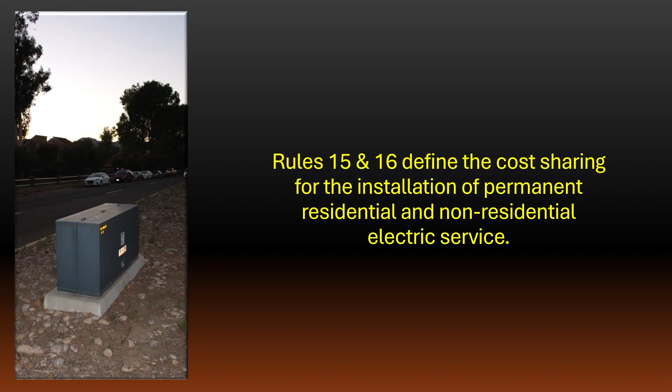If you recall from Part 1, Rules 15 and 16 define the cost sharing for the installation of permanent residential and non-residential electric service. In Part 2, we're going to cover some special or unusual construction situations in which the application of the rules may vary. For example, Rule 15 requires special facilities requested by the applicant to be at the applicant's expense.

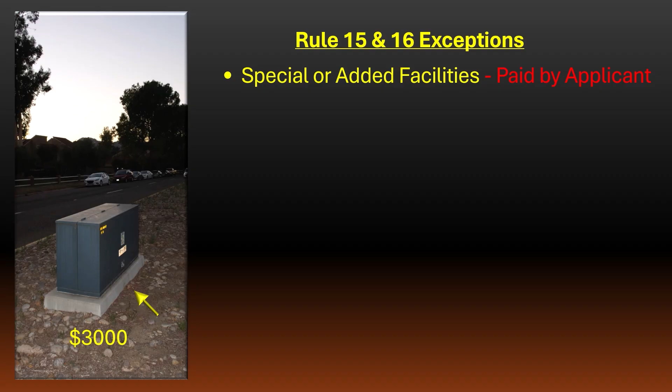For example, to connect underground runs of conduit and high-voltage cable, many utilities prefer to use pad-mounted terminator cabinets, similar to the one shown at the left. However, to minimize the visual impact of this type of equipment in new residential neighborhoods, many developers prefer the use of more expensive subsurface vaults, shown at the right.

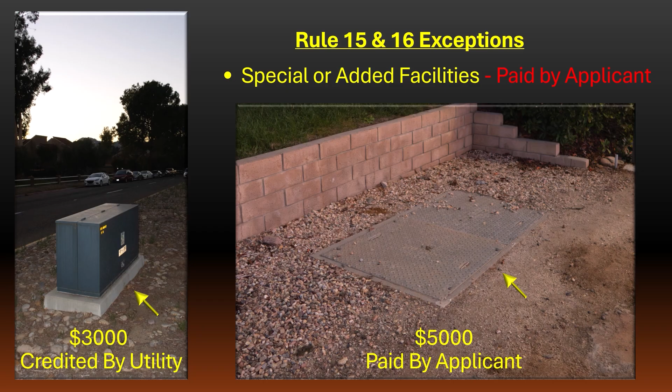When the vaults are installed in place of the cabinets, the additional expense will be paid by the applicant, and when the facilities are deeded, the utility will credit to the applicant the value of the cabinet pad only, not the value of the vault. This is an example of how the additional expense of special facilities is paid by the applicant.

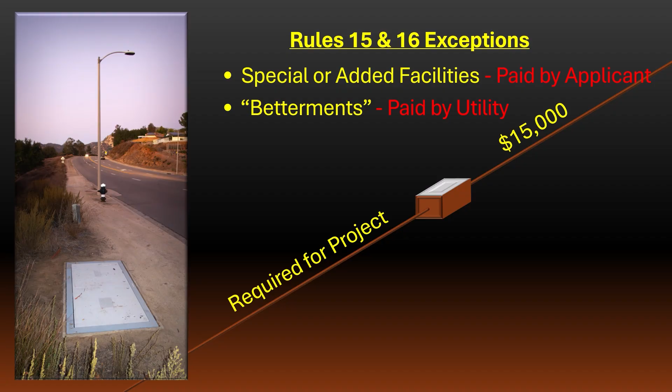Conversely, betterments are defined as the additional facilities installed by the applicant at the request of the utility. This may include additional substructures, conduits, or other facilities requested by the utility for future use. For example, if it's determined the conduit and vault shown are the facilities required for the applicant's project, but the utility requests additional conduits or larger vaults, the additional cost may be paid by the utility.

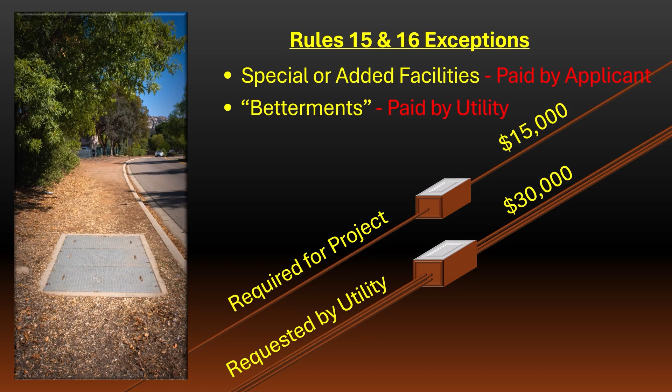Relocations or rearrangements of any existing electric facilities at the request of an applicant will be paid by the applicant. For example, if the transformer shown at the left needs to be relocated because of new construction on the applicant's property, all expenses of the relocation will be paid by the applicant.

When overhead electric facilities exist and an applicant requests to have the facilities converted to underground, this is an overhead to underground conversion and is not covered under Rules 15 or 16. See CPUC Rule 20 or check with your local utility representative for the construction and cost responsibilities of overhead conversions.

Streetlights shall be installed in accordance with the service provisions of the applicable streetlight schedule. Construction of facilities for emergency or insignificant loads are not eligible for allowances. And finally, temporary services are installed in accordance with the fundamental provisions of Rule 15, except all charges and refunds shall be made in accordance with CPUC Rule 13. Check with your local utility representative to determine if your project includes any of these special provisions.

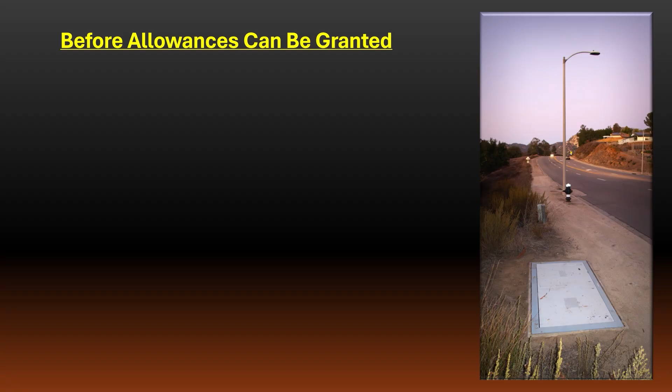Before allowances can be granted by the utility, a few provisions need to be met by the applicant. First, the utility is provided evidence that construction will proceed promptly and financing is adequate, and the applicant has submitted evidence of building permits, home purchase contracts, or lease agreements, or where there is equivalent evidence of occupancy or electric usage satisfactory to the utility. Once these provisions have been met and are satisfactory to the utility, the allowances will be granted and construction can begin.

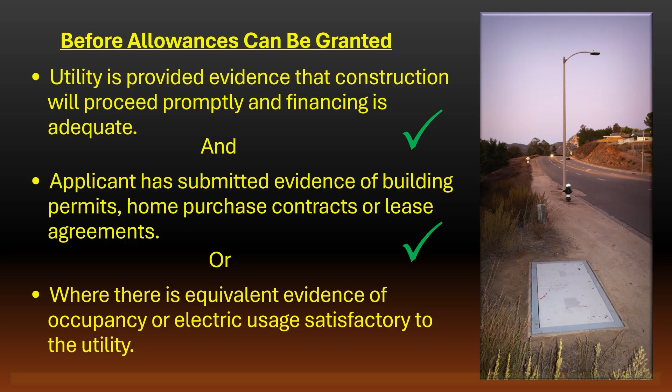Before we get to the example, let's talk a little more about facilities that are installed by the applicant and those deeded to the utility. If you recall the example from Part 1, let's start with the electric meter panel. This electric enclosure is installed and owned by the applicant. Conversely, the electric meter is always installed and owned by the utility.

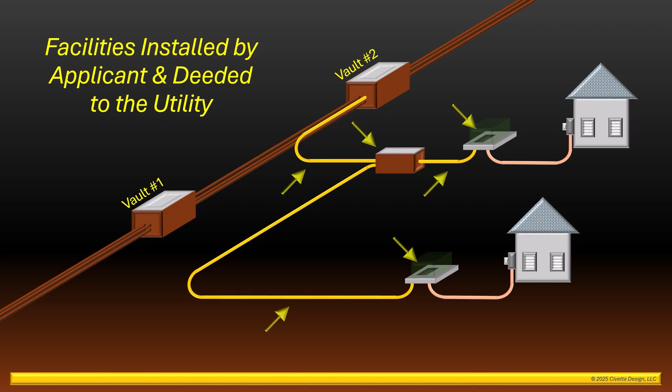The service conduits are installed and owned by the applicant. However, the service conductors within the conduits are installed and owned by the utility. The substructures and primary conduits, including the concrete pads on top of which pad-mounted electric facilities are installed, are all installed by the applicant and deeded to the utility. The transformers and high-voltage cable are all installed and owned by the utility.

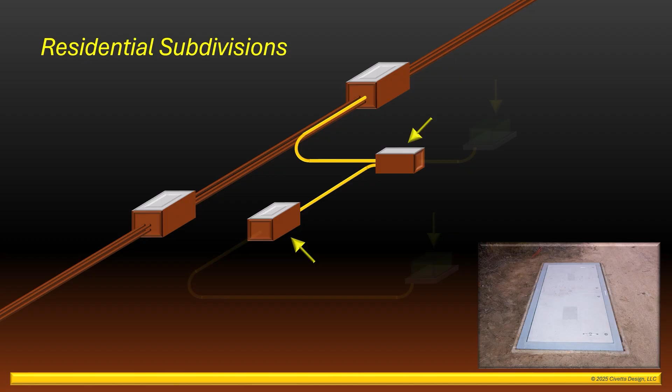Let's take a look at a residential subdivision. In this type of electric distribution construction, the distribution extension into the subdivision is typically comprised of conduit containing high-voltage conductor and a series of underground vaults connecting the conduit and cable. The conduit, conductor, and vaults are typically installed under new sidewalks that wind their way throughout the subdivision. Electric transformers are typically installed behind the sidewalks and between the homes.

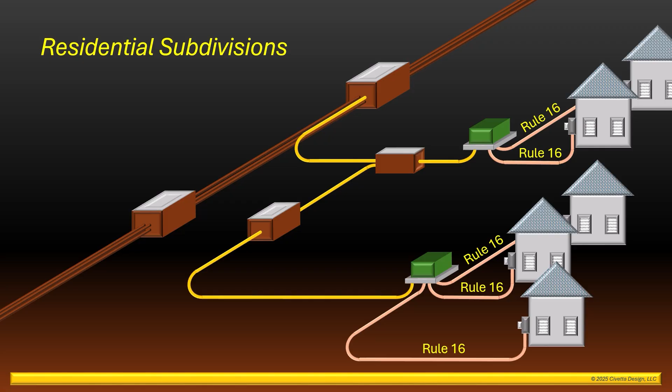Depending on the size of the new homes, a single transformer can provide electric service to about 20 homes. Since the transformers provide electric service to more than one customer, everything installed up to and including the transformer is installed under the provisions of Rule 15. Each of the individual services are then installed under the provisions of Rule 16.

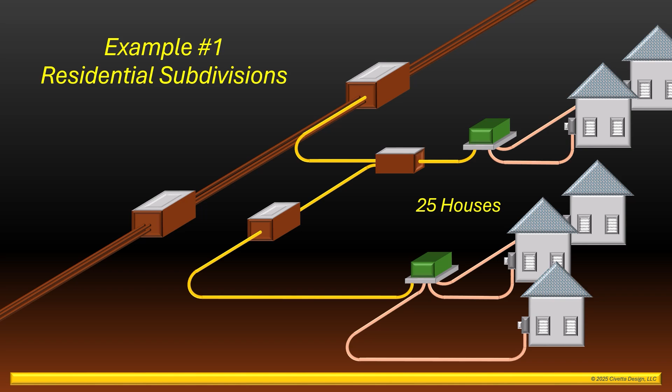Let's do an example. Let's assume a developer wants to build a residential subdivision with 25 new houses. To start the project, the developer hires an applicant designer at a cost of $12,000 to complete the construction plans required for the new development. This period of time is typically referred to as the planning phase.

During production of the construction plans, the utility requests some additional facilities to be installed that are not related to the project itself. Located on the property of, but not related to the new electric service of the development, this would be considered a betterment.

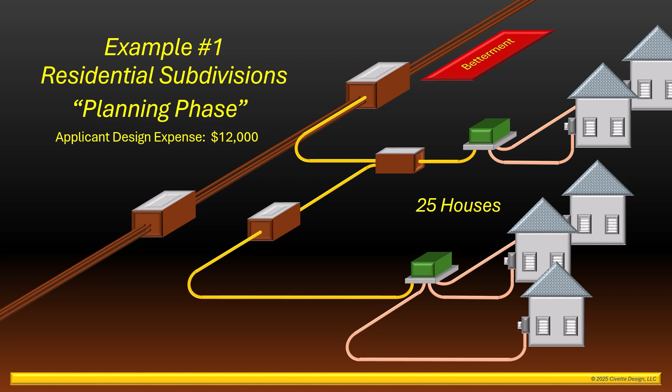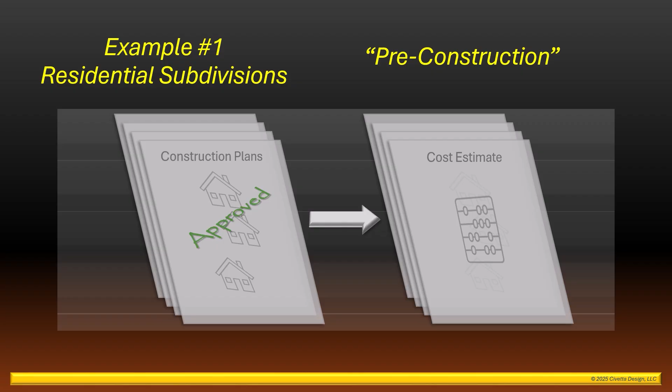Once the construction plans were completed and approved, the project advanced to the pre-construction phase. During this period of time, the utility was then able to provide a construction estimate to determine the estimated construction costs, allowances, and credits. They will first determine the estimated value of the substructures to be installed by the applicant for the work related to the subdivision, $34,200. Second, they will determine the additional cost for installation of the betterments requested by the utility, $9,000.

And lastly, they will determine the cost of the portion of the work to be completed by the utility, $63,800. The total of $107,000 is what needs to be paid to the utility prior to starting any work. Next, they will determine the applicant's construction allowance. In this case, it would be the fixed residential allowance of $3,250 for each of the 25 new homes, a total allowance of $81,250.

Since the developer hired an applicant designer to produce the construction plans at a cost of $12,000, the utility provides a credit for the cost of the plans had the utility performed the work themselves, $9,500. Lastly, they will determine the construction credits for the work to be performed by the applicant. This includes the estimated value of the substructures installed by the applicant for the development, which was already determined to be $34,200. The utility pays the additional cost of the betterments, including the installation, estimated at $9,000. The total estimated value of this work, $43,200, is the applicant installation credit.

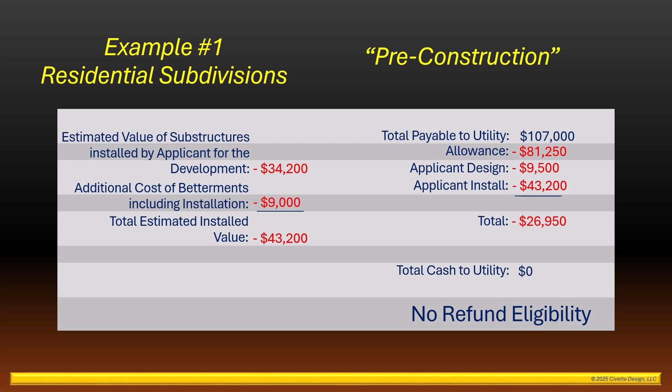Once the costs have been determined, the project can proceed to the construction phase. The applicant hires a construction contractor at a cost of $92,000 to complete the applicant's portion of the work. From Part 1, you'll recall this includes all trenching, backfill, and installation of the conduits and substructures. Once inspected and accepted by the utility, ownership of most of the new facilities is conveyed to the utility. The utility will then complete their portion of the work, including installation of the cable, transformers, meters, and any other equipment necessary to begin providing electric service to the new development.

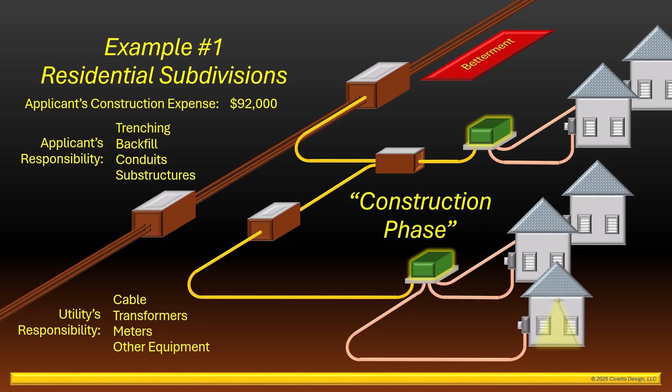When the construction was completed and the system was energized, the project advanced to the final stage, the cost accounting phase. During this phase, the utility will reconcile the final costs of the project, enter the new assets into their rate base, and begin the process of billing the new customers for the service of providing electricity. While we're here, let's look at the applicant's total investment in the project. The cost of the utility's portion of the construction, $63,800, for which the utility granted an allowance of $81,250. The total cost of the applicant's portion of the construction, $92,000.

After the work was inspected and accepted by the utility, a credit of $34,200 was granted for the value of the substructures. The applicant installed the betterments at the request of the utility, $9,000, for which the utility credited the entire amount of $9,000. The applicant also hired an engineering firm to produce the construction plans at a cost of $12,000. The utility credited back $9,500, the value of the construction plans had the utility performed the work themselves. The applicant's total expense, $42,850.

Now, let's look at the utility's investment in the project. The allowance granted for each of the 25 new homes, $81,250. Plus the credit provided to the applicant for the substructures, $34,200. They covered the cost of the installation of the betterments, $9,000. And finally, the engineering credit for the applicant-designed construction plans, $9,500. The utility's total investment in the project, $133,950. The cost sharing illustrated in this example includes adjustments for the betterments requested by the utility. Also, the values shown in this or any other example should not be used to determine actual expenses for any similar project.

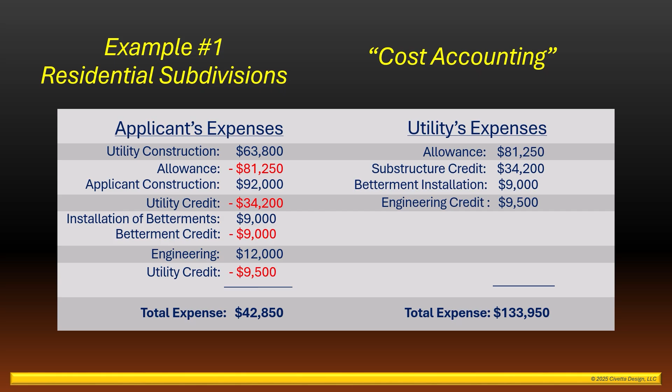Thanks, Charlie, and thank you all for joining us for part 2 of our series on CPUC Rules 15 and 16. In this video, we talked about some exceptions and exclusions to the rules that may apply to your project. We also discussed some requirements that need to be met before the utility will grant allowances. We expanded a bit more about the facilities that are installed by the applicant and deeded to the utility. And finally, we showed an example of a residential subdivision that included the addition of betterments and special facilities.